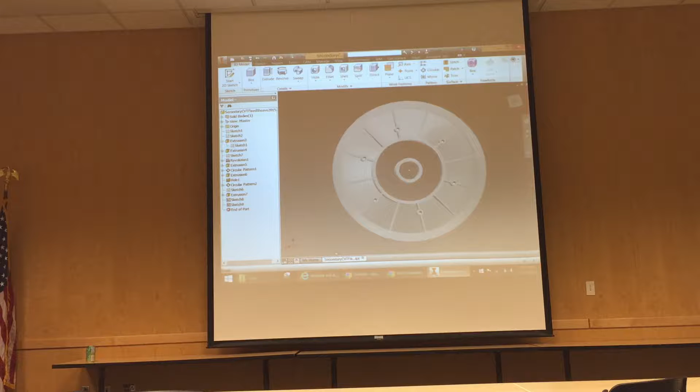First lesson, how to save a part. You put this button right here. Does it save? Yeah, can you show us that again? It's saved to my hard drive.

You got it fast, wait I'm confused. Should be, I'm used to waiting 20 minutes for it. Well, that's not connected to the M drive. Are you connected to the M drive? Yeah. But it's slow, like it's a slow connection because you're connected to the M drive.

Yeah, exactly. Alright, here's a caliper too. How do I get to that? Why do you have a caliper? Got it, got it, Chipmunk, Chippy. Why do you have a caliper? Is this yours? Yeah, no, why? It's school's. Why, Calvin? Because I was measuring the CVTs. Don't bump this table, okay.

Welcome to Inventor Training.

Rowan, I'm just filming the screen, so we're good. So, I don't know if you guys want to go over making a part, but I think the main thing we need to get better at as a team is assembling and constraining and putting things where they should be as far as the model structure goes.

So I'll go over that, opening the top level, and go over the tube stuff, like the tube library, because that's kind of confusing and it's something that needs to be passed out. There's a kind of half tutorial for it that shows you how to do some of it, but there's extra stuff.

So, top level. You want to turn the lights down a little? Just turn it all the way off. Jeez, there we go. Perfect. Like that? Yep. Alright.

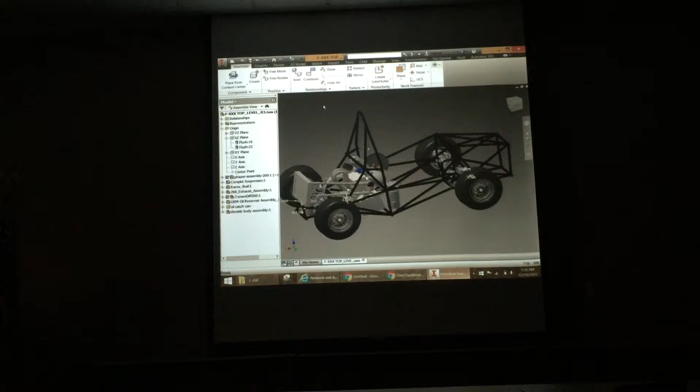So, to assemble something, I usually just do place, and I'll bring up... that's how we do it. Then you just gotta find your part again. There was something that Paul sent me. It's the fuel rail. I don't know if you know where that is. I don't know where to put it. He sent me the file. Might be in the phaser stuff.

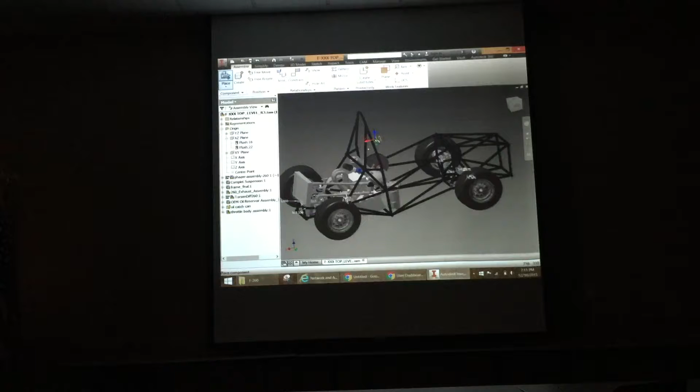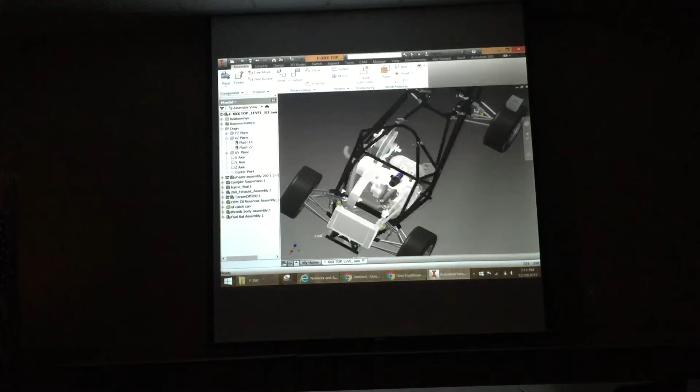When you put parts into the top level, it's always easiest to constrain them within the top level, but all these sub-assemblies over on the left is where we actually want the parts. So you're not going to open the phaser thing and assemble it into that? There's an easy way to do it, which I'll show you. You could do that, but I just want everyone to know about this. It's a really easy way to get parts organized. So does this just go right here? These two right here, those two holes.

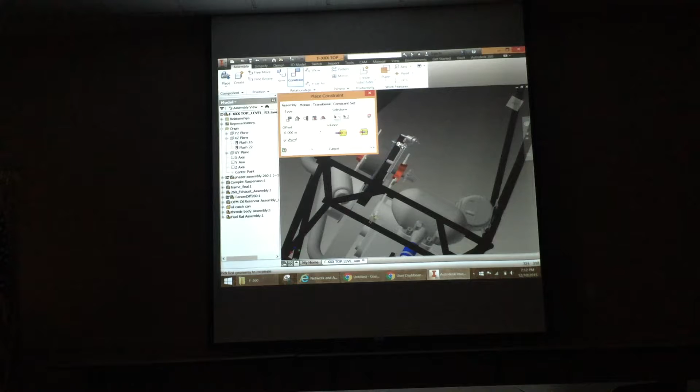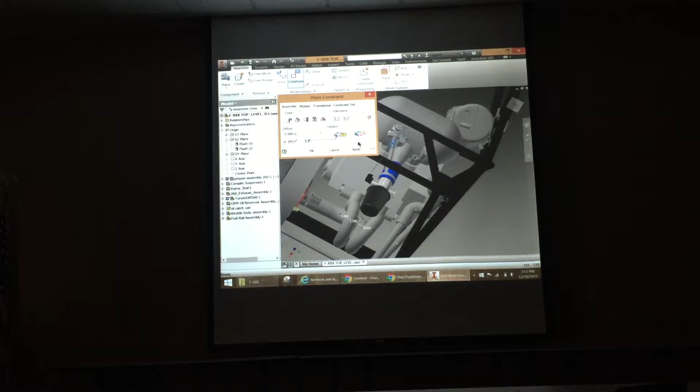So is that two selections? Are you selecting two different parts of that fuel rail then? Yeah, I guess I should explain what those are. He's not a very good teacher. So these are all the constraint types we have. Constraints are kind of goofy if you don't use any other software. I've had that error a lot. So these are all the different constraint types. You just have to pick whatever type is relevant to what you're doing. I'll try this.

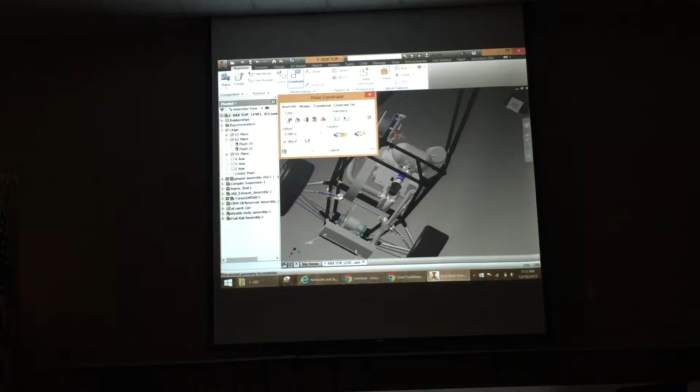Is there a way to toggle between options of how it can do the constraint? Like I've constrained two axes together with a mate, and the thing could be this way or it could be flipped around. I tried doing it in different orders and it doesn't change it. There's no option to do that, but if you get it close to the orientation you want, I'm pretty sure Inventor will just go closest to whatever the part's oriented like. Wait, isn't it the flip solution, so you can flip it around? Sometimes that'll work. It doesn't do that for axes, I'm pretty sure.

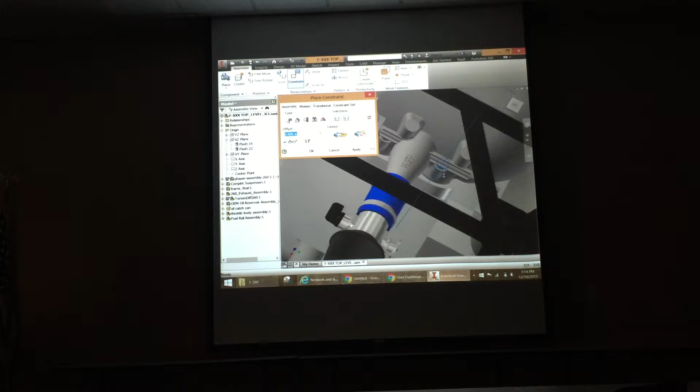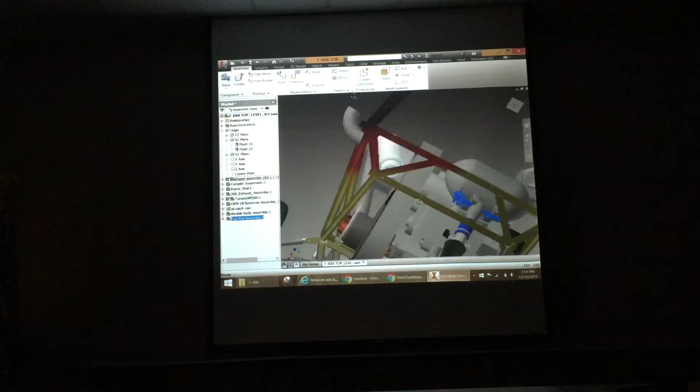Something must be messed up with this. So here you just select the first geometry you want to constrain, second geometry. Did it automatically select the second one for you? Yeah. Okay. The first, yeah, I don't think that fuel rail will work. I'm pretty sure something's messed up with the... Well, it just needs to go up out of the holes an inch or two. Yeah, it looked like it was selecting a face that was kind of deeper in the manifold.

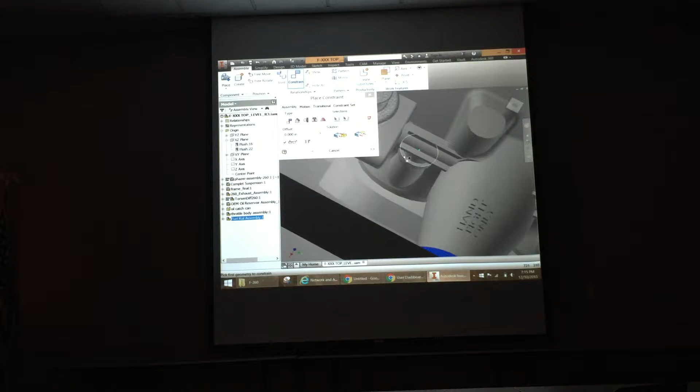So how'd you get to that little drop down menu? Okay. So, say I didn't want to select this face, which is what I actually want to select. If I wanted to go to like the inside of this cylinder, you just right click, select other, and it brings you a drop down of all the geometry that's in line with where your mouse is there. So you can just scroll through and pick whichever one you want.

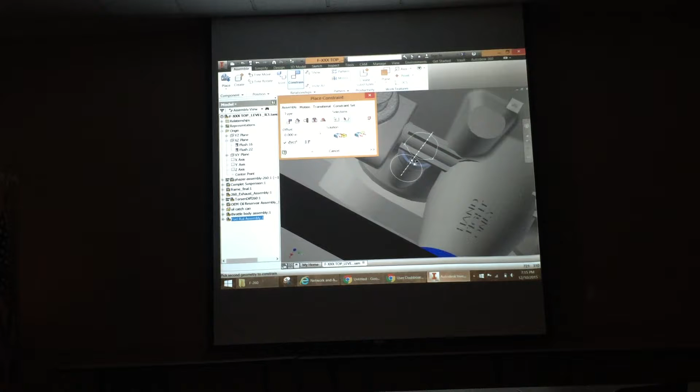So like right now you're constrained along those like two axes, right? In the face. Can you do something in Inventor where you can change the distance of that face to your other face? Yeah, that's what I'm trying to. Okay. It's offset. Trying to get to the bottom face of the rail, but I don't think it's gonna work. The insert tool is pretty handy for doing stuff like this. If you do this opposed, you can select

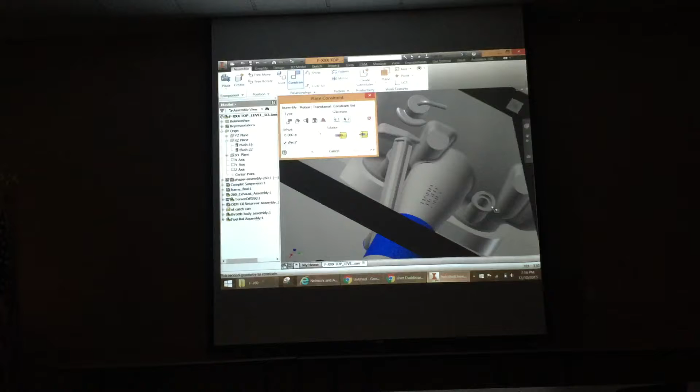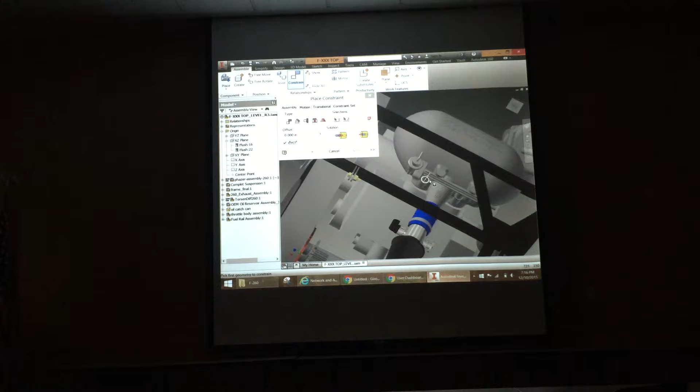Yeah, it looks good, I think. Actually, I think you have it backwards. I think it's supposed to be flipped around 180 degrees. No, that's right. Is it? Yeah. Wait, it's pretty symmetrical. Oh, you're right, yep. I thought we were looking at the car the other way.

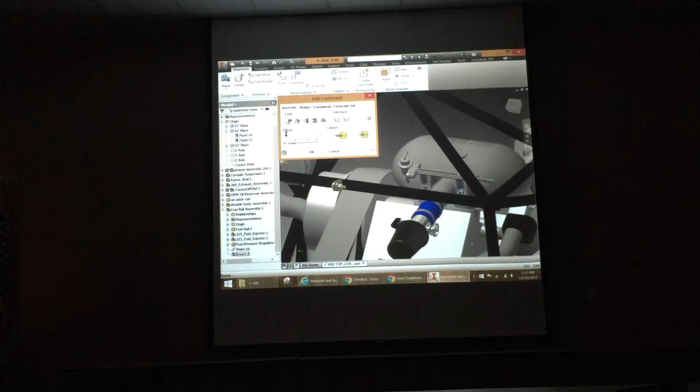So right now, if you wanted to change that distance from that face to the other face, how would you do that? Down here, these are those two constraints I just put in. Just edit this guy, add an offset. Oh, okay. Like say I wanted it 1 inch out. Cool. And if you wanted to move down, just use a negative value and move the other way.

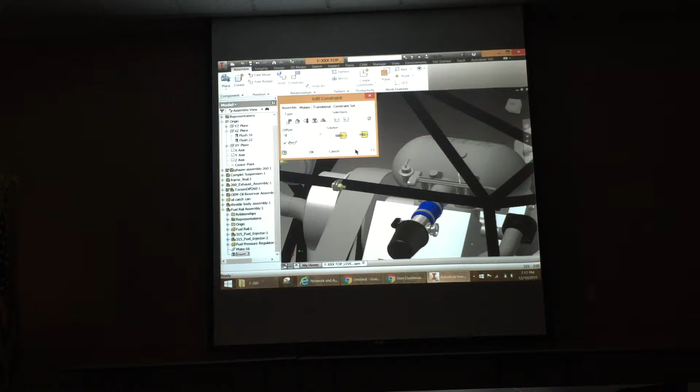And how are you editing both of those at once? What do you mean? Cause didn't you put two mates in there, one for each connection? Yeah. After the first one, I just clicked apply. And then that saved that constraint, the constraint's done now, and then do the next one. Okay. I didn't do them both at the same time, I did them one at a time. I just did them in the same window.

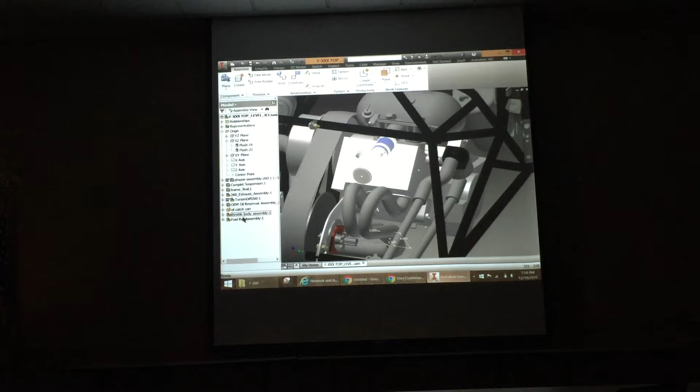Right now, this guy is just kinda all by itself out here, and it's all assembly, which isn't really organized. It's how a lot of the past cars are. You look at the past cars, the model trees are like 80 miles long, it's full of weird stuff. So the easiest way that I've found to get these into the right spot... Would it make sense to put these two in the same assembly? I'd put them both in the phaser assembly, but that's just me.

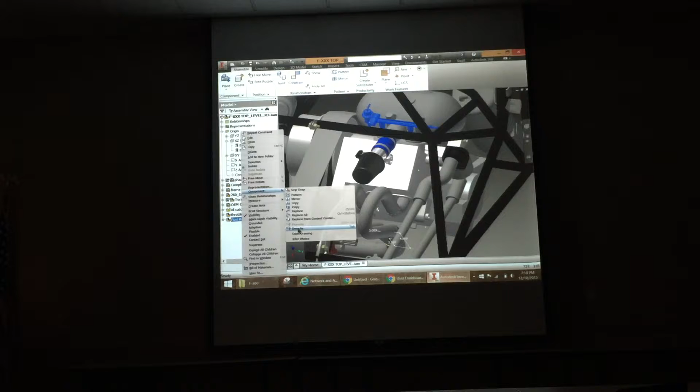So, if you come in here, you right click whatever components you have there. Come up here to component and demote. What this does is if you multi-select parts and do that, it'll take all those parts, put them in its own assembly, and move them down like one level.

So it grounds them in space, and then the assembly that it creates has the same origin planes as the top level. So once you create this new assembly, you can just bring it in, match up the origin planes, and then it'll be in the right place every time. And it's really a good way to get these things to work.

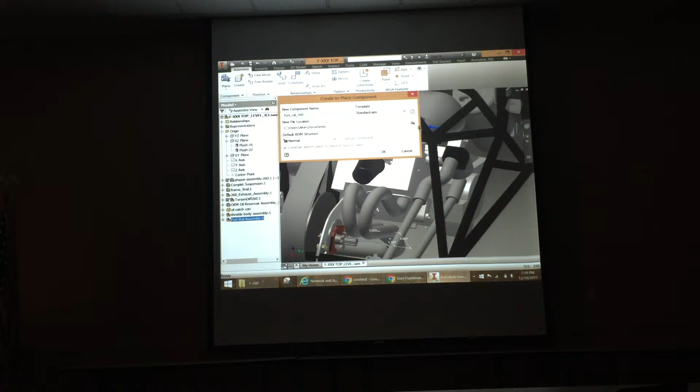Should we use underscores instead of spaces in everything in this? Doesn't matter. That's just a habit. That's what I have to do for work. And then find where you want it to save this new assembly.

So right here, it's kind of redundant to have two assemblies there, but like you said, it would probably be better to open the phaser and assemble it there, but I just want to show you guys this. This is the only part I have to do.

So now, when you right click on the whole engine assembly and open it, it's gonna open the fuel rail too instead of just leaving it behind? Not yet. Wait, so what is this doing? It's taking this fuel rail assembly and moving it to a new assembly. So is it gonna lump it with the throttle body? I could if I selected this too when I started, but there's gonna be an assembly down here called fuel rail 260 assembly, and within that assembly is gonna be this.

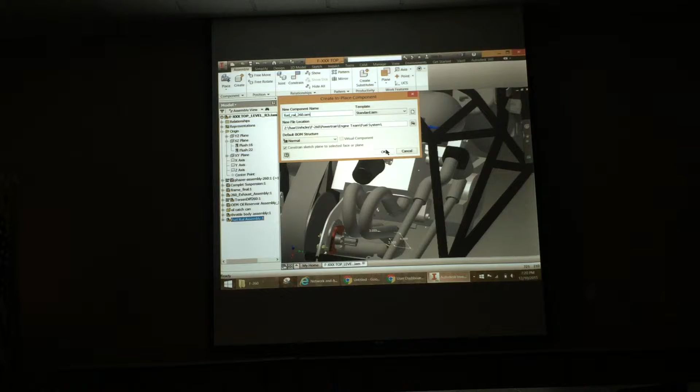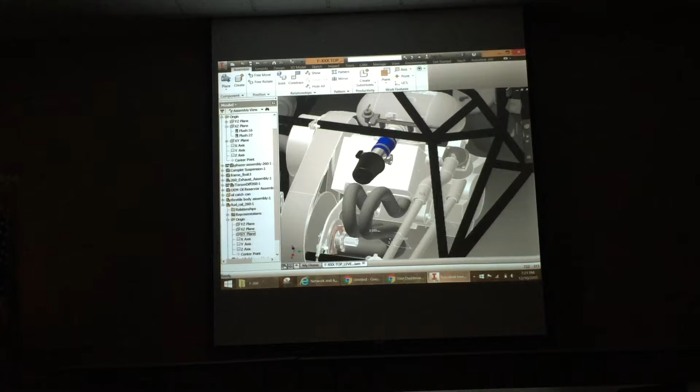Okay. So what that is allowing you to do is if you put the fuel rail and the intake manifold together in one assembly, that would allow you to put them in together, having already been constrained to each other correctly? Yeah. Okay. So this is right here, and look where the origin planes are on this new assembly. Instead of being somewhere within there, they match up with the car. That's what that demote tool does.

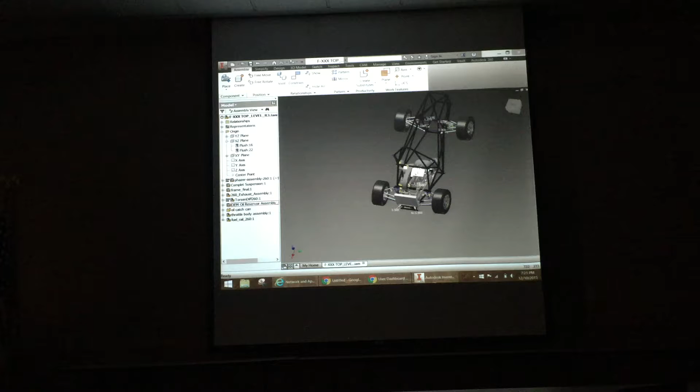So now that this is in here, how long does it take to save the top level? A while. Don't save the top level. Is that slow with your guys' computers when you have them on the drive? It's not too bad at my house when I have it hooked up to my internet there. I kind of got it just to show you guys, but I'm gonna save this, and then it'll save that assembly in that file path that we chose when we clicked demote.

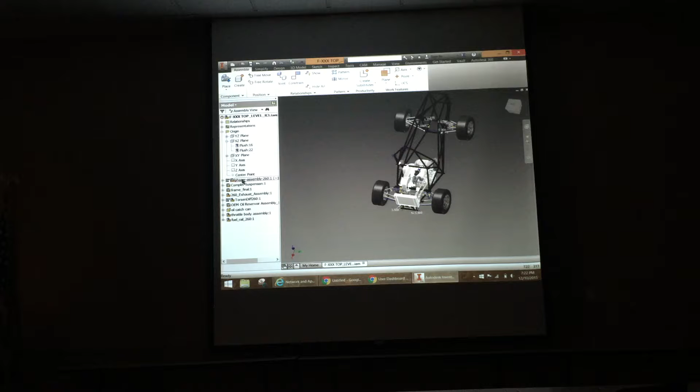And then what we can do is open up the phaser assembly, which has the same origin planes as the top level. And then when we put the fuel rail assembly in there, it also has those same origin planes, so we can just match those up and it's good to go. And that way, say you constrain the fuel rail to the intake and the holes on the intake change somehow, your fuel rail is gonna fail because it doesn't know what it's constrained to anymore. But if you use this demote tool, those planes will always be there, so you can change parts higher up in your constraint chain without messing up parts that you put in there.

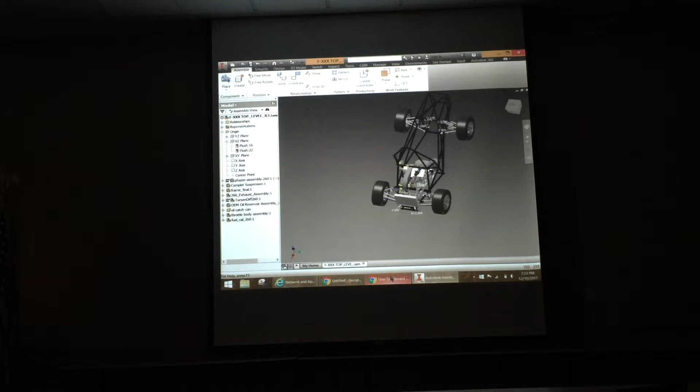So that would mean that the fuel rail would still be constrained to the global, the car's origin planes, and that's why it doesn't freak out when it loses the manifold. I can see why this would be really helpful for certain parts, but for the fuel rail, wouldn't you want it to fail if you change the holes on the intake? Yeah, that's why it'd be better just to assemble it right into the phaser, but the other parts still don't. Okay. So I'll probably go back later and change it, but just for demonstration's sake.

You got any other questions so far? Let's do the tube thing. Yeah. Alright.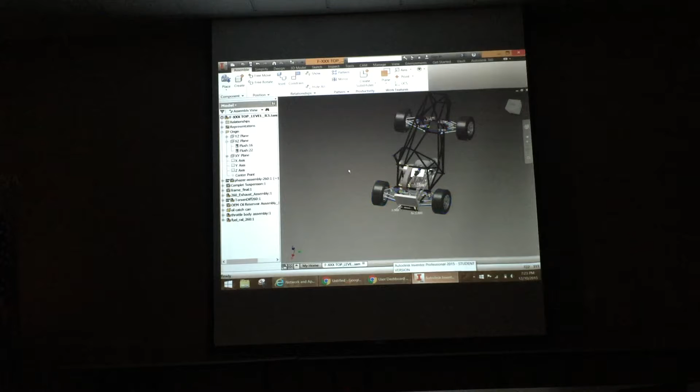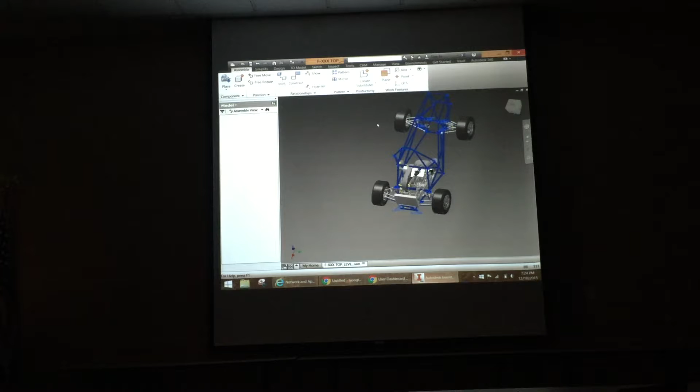So the point of using demote is getting those planes to line up. And then, say you're mounting something into the radiator, and you have like 5 different parts that all mount to the radiator, but they're not assembled to each other. Each one is assembled to the top level. You assemble all your mounts to the top level where you need them, group them together, and then you can demote that assembly. And then instead of having like 20 different constraints just for these mounts, they're all grounded and there's only 3 constraints that match up those points.

Alright, so this is our frame. To build it, we use the frame generator tool, which is a pretty cool feature. It's all built off of a 3D sketch, which is what this is. We use software to optimize our suspension points. We haven't done it in a while, but in the past 3 or 4 cars, we've used points from previous cars to build the new cars.

So it's like an Excel sheet of points that all gets imported, and then we create this line structure using just the 3D sketch. And then once we have that, we use this frame tool. So we can insert frame. I'll just delete the names to show.

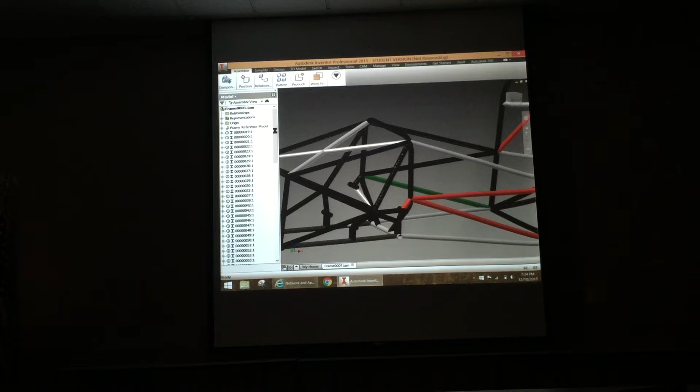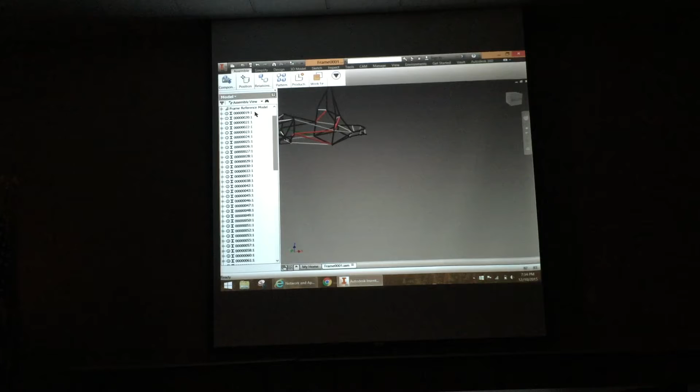This is the one we used for the laser cutting stuff. No. Yeah, the fixed constraints, they're easy to remove. Could you just uncheck it? That's it. Yeah, but if you're constraining to something that's fixed, it's all right. It's not gonna affect it.

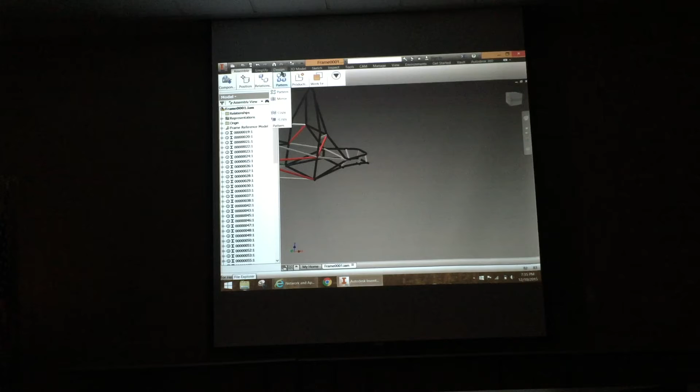But I'll just go through this. Like I said, go to frame, insert frame. Actually using the frame generator once it's set up is really simple. Just go insert frame, and then find whatever sketch element you want to use, click on it,

and then there's a window with different options that you can have for your tube properties, and that's where we pick. It's an unnamed standard that we put in there in the content center, the FSAE. It shows up as unnamed, and that'll have all our different tube sizes in there. So.

Is there anything else you want me to go over after this, Adam?

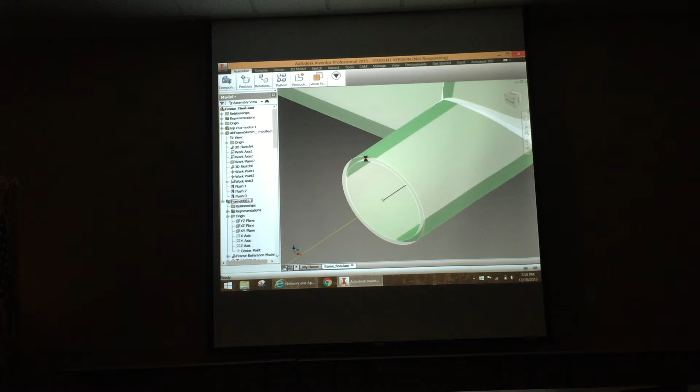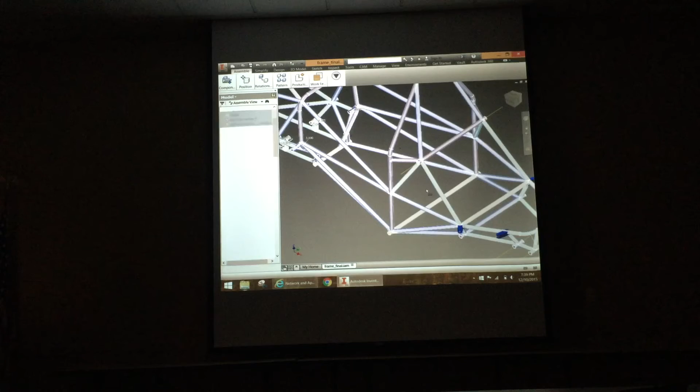If you're putting a tab on a tube, so it's like a square with a semicircle cut out of it, you can mate the surface of the cut to the tube, and then you just have to find something else and constrain angle to it to keep the thing from spinning around the tube. And then just distance from the end of the tube.

A lot of times, what I've found that works is if you take the end face of your tab, the narrow face, and make a tangent to the tube, and then you can use the angle constraint for the face, and then if another tube comes off that tube and you want to be parallel with it, you can use that. Okay. But sometimes, yesterday I spent 20 minutes trying to figure out how to constrain a little tab. It's frustrating.

Alright, come on, computer.

Oh, do you know a way to get, often if you do a measure command, you get delta X, delta Y, delta Z, and the distance. But then I was measuring between two axes and I wasn't getting those, I was just getting the distance. Is there a way to tell it to give you the other ones too? If you measure between... Maybe it was because they weren't perfectly parallel, so it just gave me the closest one.

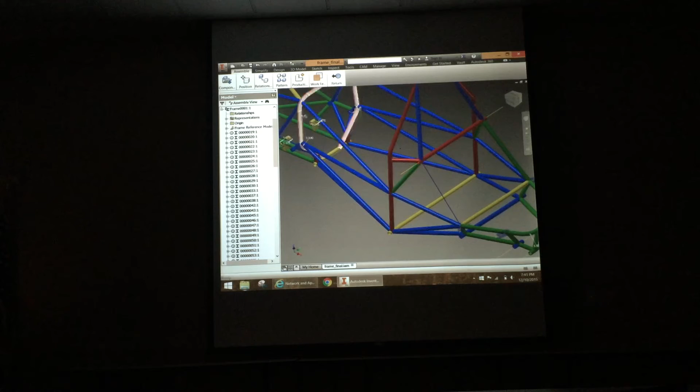Okay, so we want to put a frame piece right here. So design, insert frame, and this is the box it brings up. This wouldn't be here if we didn't do that file copy thing that we did before. And these other ones are all industry related items and stuff. So let's put it there. So 065. Blue's 065.

This one was green. Oh, okay. My bad, I thought it was blue. So we set all these parameters. These two are the same, but if you don't set both of them, they'll fail. And then colors. Is that bright green or something? Do you remember what green is? No idea. You just click on one of the other ones. It doesn't really matter what color it is for now. I'll just make it red. Our colors are red for 095, blue for 065, green for 049, and yellow for 35.

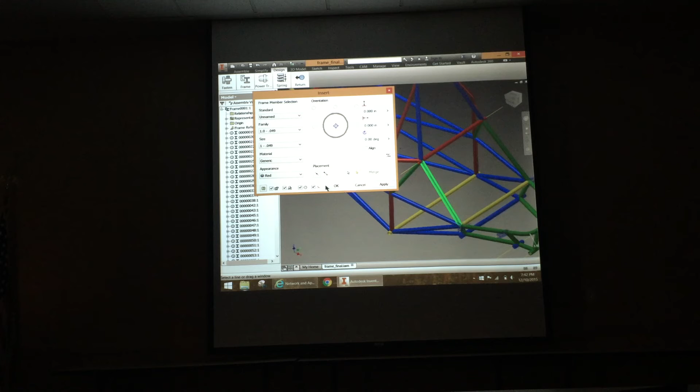So we can just select which one you want. Gives you a little preview, nice and green, which is always good. Okay, it just tells you this is gonna be the name of this tube part, and we'll put it in this tree.

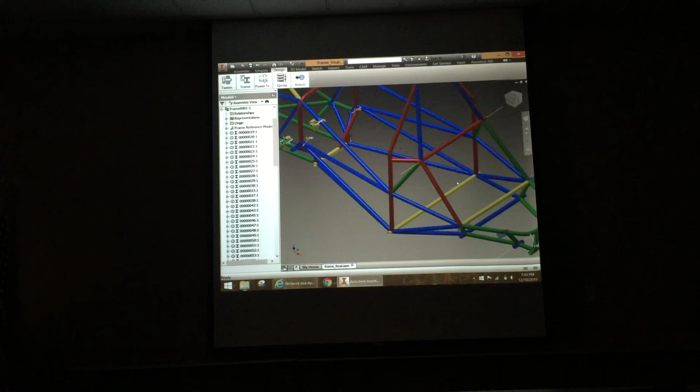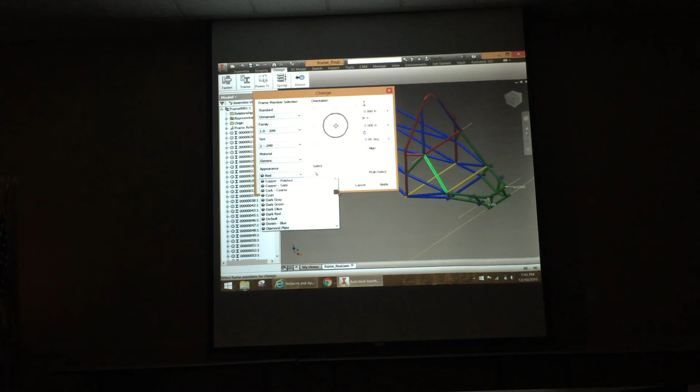So you don't have to do anything to the end of the tubes? No, it notches it for you. Oh, okay. I thought it didn't. Well, if you want to do that, you just click the notch thing. I can show you that. It is dark green. Is there a way in the top level to turn off visibility of one chunk of the frame if I'm trying to look at another one to constrain the other one?

There's one piece of frame tubing that's blocking my ability to see something, to figure out the measurement. If you're in the top level, you have to double click the frame to activate that assembly.

Once you've opened it and double clicked again, you can highlight a specific tube and turn off visibility. But that line will still be there.

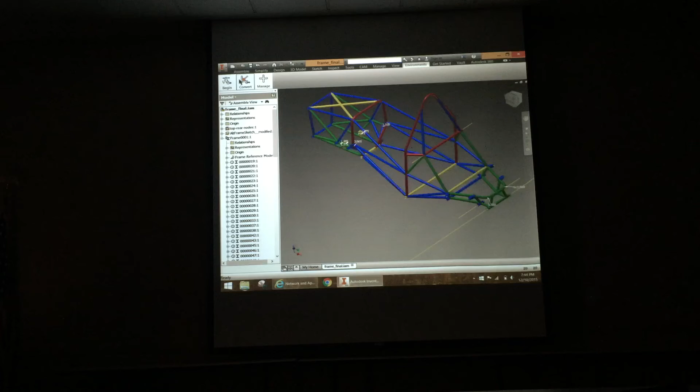So rendering is in Environments. On a normal computer this will just be up here, then the Environments tab. It's Inventor Studio.

Say you wanted to render just this isometric view, just click Render, then Render Image, and you can pick like a background.

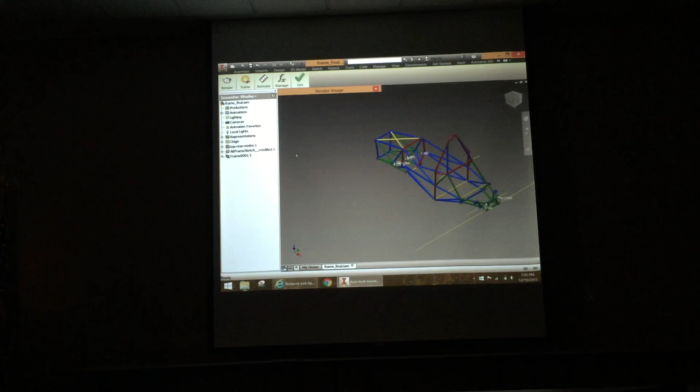There's quite a bit of different stuff you can do with the background, but I'm not sure how to do that. You remember Carl had that one where it was in that shop? He did that actually in Inventor. What's it called? We'll just do some gallery for now.

We can change the background, so you could choose like white or something. I think there must be white somewhere, and if not, just change your background color to white and use that. Oh okay, that's probably what they did. I'm not sure how to change the background though, you'd have to Google that.

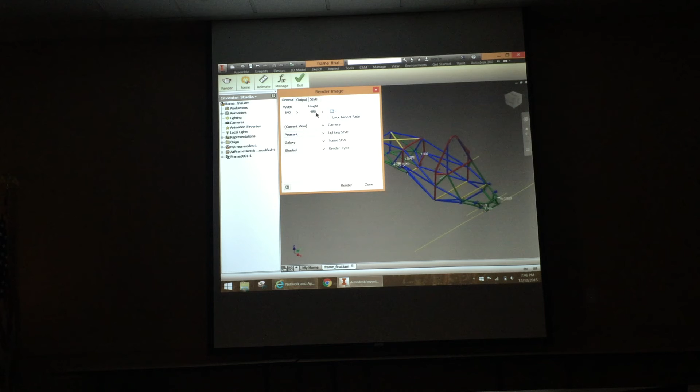You can change the lighting, with pleasant lighting. This is a really bad quality picture, so just change it to like 1080 or 720.

This style works sometimes and doesn't work other times. It looks really cool when it works. Like when we did our rendering of the body, it had all the reflected parts of the body, but sometimes it just looks goofy with a bunch of weird lines. Then just click Render.

And there it is, in the gallery. If you like it, just click Save and it'll put it wherever you want. If you don't like it, you change settings and start again.

Can you put multiple pictures on one rendering? Like if you want a top, front, side view, I think you'd have to render each of these separately and then combine them in Inventor, or just in paint.

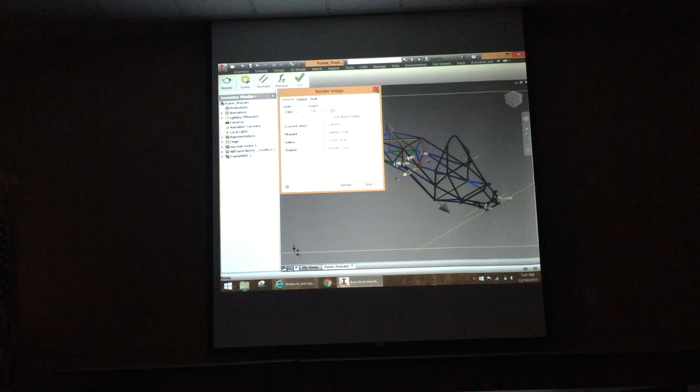I'm just wondering because I gotta do that for SES too. I can help you with that. The only thing I'm not sure about is how to change the background. You can change something with the lighting, but I don't know what this is exactly. Not too worried about it.

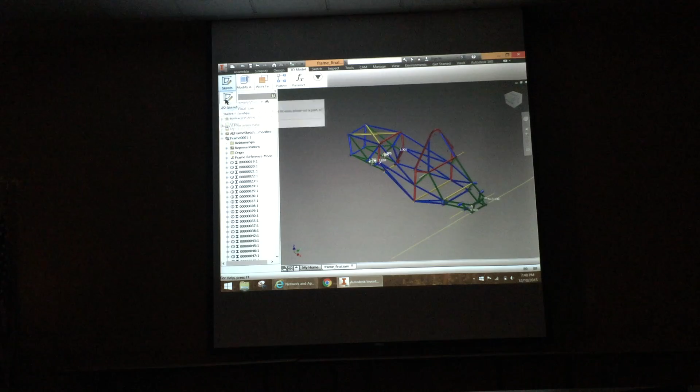Alright, anything else anyone wants to talk about? How do you do a 3D sketch? Good question, it should be right there. Probably if you just went to New, I think it would show up. Yeah, I was wondering about that too, because modeling we've all learned in class, like where you just extrude things, but 3D sketching I'm never quite confident with.

The way we do it is we import the points, which you have to look up on a tutorial, I can't remember how exactly. There's a thing on the top ribbon where you click Import Excel Points, then your points are in there and you start connecting stuff where you need to. Will showed me his program, the Excel to optimize the points, and it only gives you one set of 4 points. You take that, place it, take another set of 4, place that, take the rear, place it.

Every time I did it there were 8 points. With the 8 points, as in 8 suspension points, or 16? We can look at it later.